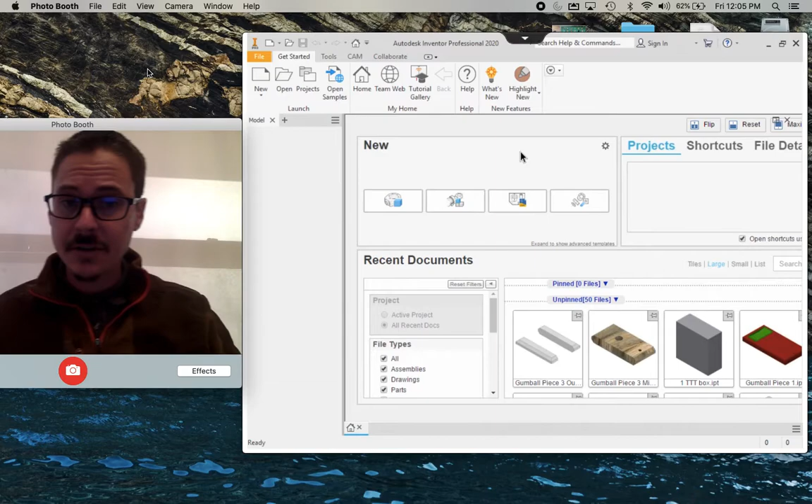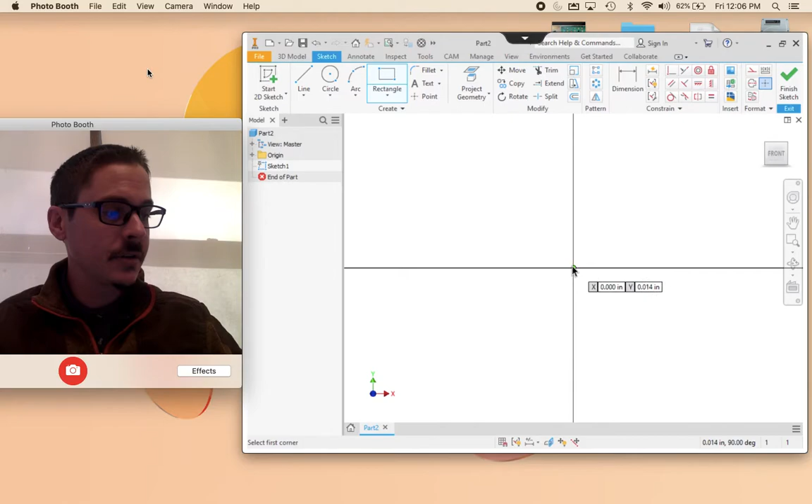I've already opened up Inventor in the workspace. I'm going to create a new standard IPT. And I'm going to start a 2D sketch on the front plane like we've been doing, the XY. Grab a 2-point rectangle. My first point is going to be at the origin. One click. Slide your mouse up into the top right. This is going to be 8 inches long and 3/4 of an inch tall.

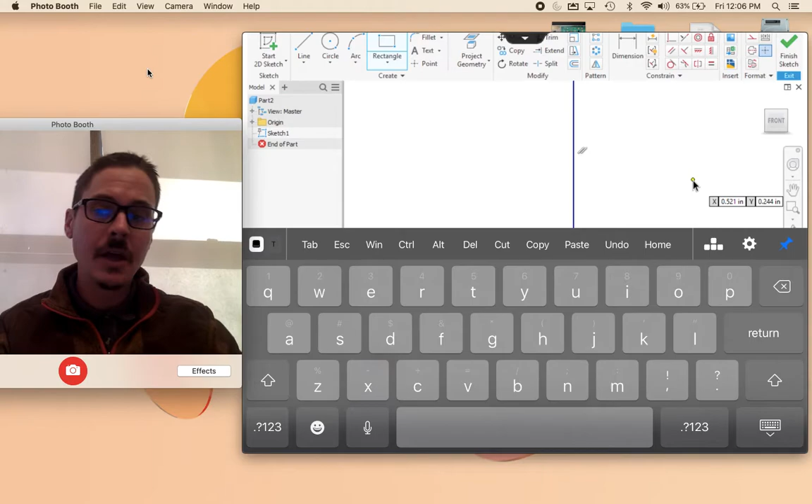So grabbing my keyboard, I need 8, tab, 0.75, return. Now before I put my keyboard away, as I normally like to do, I'm going to pin the tab and escape bar. Then I'm going to drop my keyboard down. I'd like to get rid of my rectangle tool, so I hit the escape key down here, ESC, and then I click on the word front, so I can see everything in front of me.

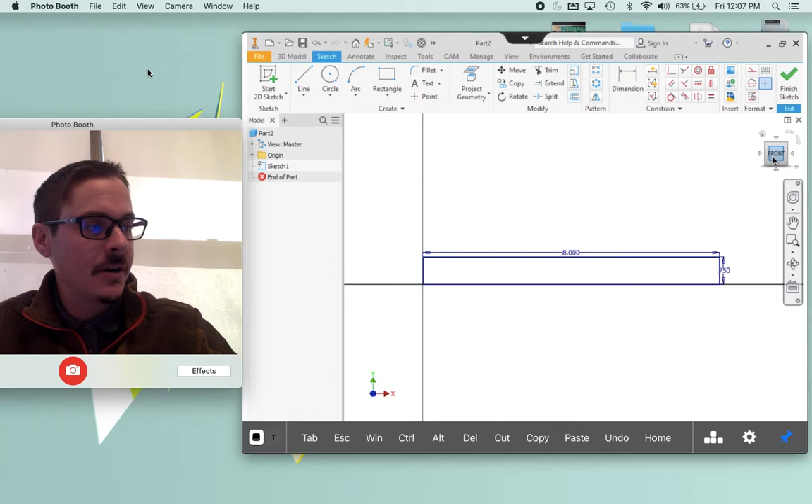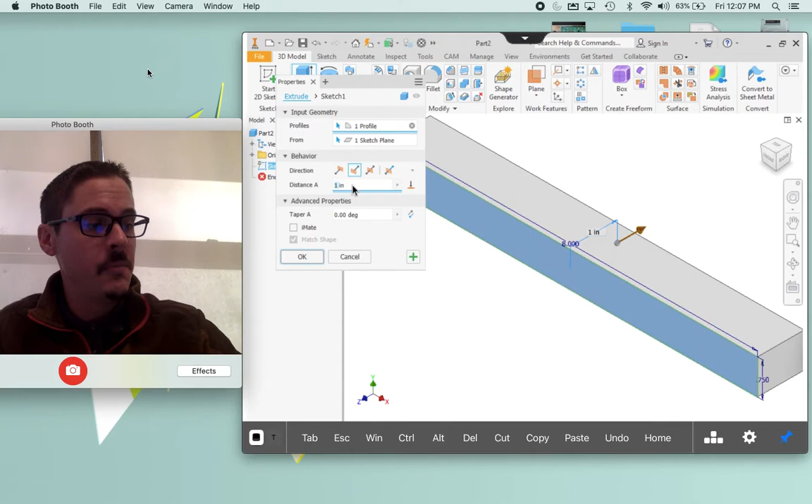Just like we've done with the other parts so far, this is all we need for our first sketch, so we're going to finish the sketch. Come into our home view, and we're going to extrude this 4 inches in direction 2. So I'm going to grab an extrude. I would like to flip this into direction 2 and change the distance here to 4 inches. Put the number 4 in and click OK.

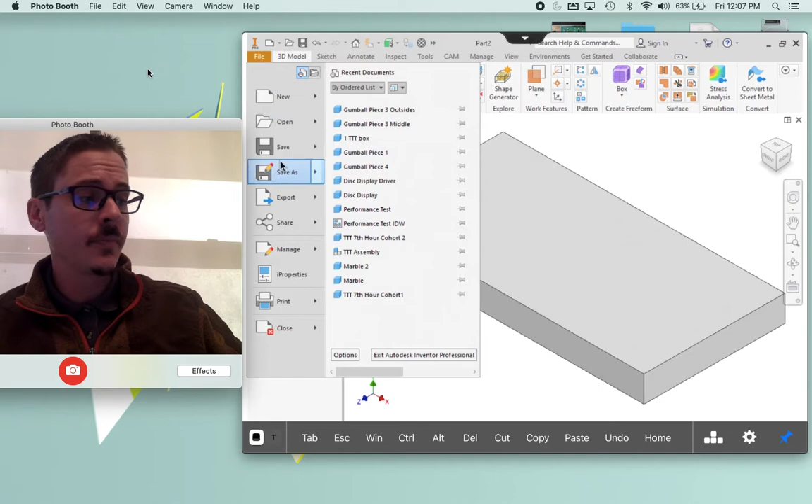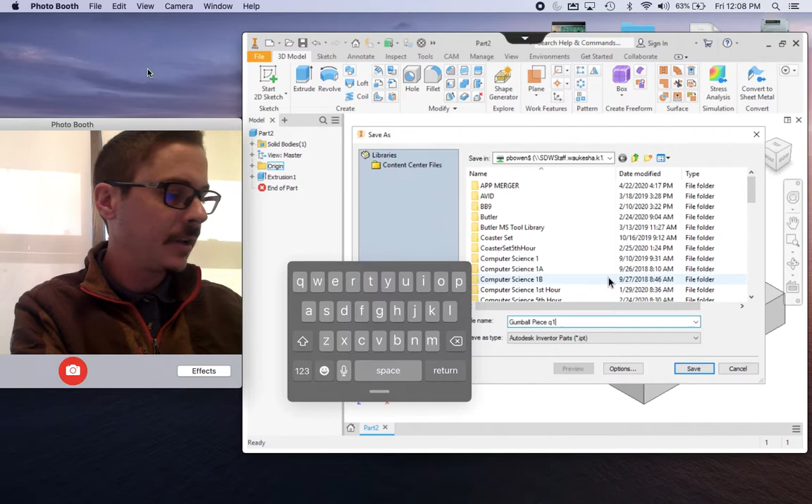Before we go further into the next steps, let's make sure we save this part. We're going to go up to the orange file. We're going to go Save As. Double check you're going into your H drive up here. And then the name down at the bottom should be Gumball Piece 1. I think I maybe put an extra letter in there. I did. Gumball Piece 1. Gonna go ahead and save that. So now that's in my H drive. Anytime I click the quick save, it'll automatically go to that location.

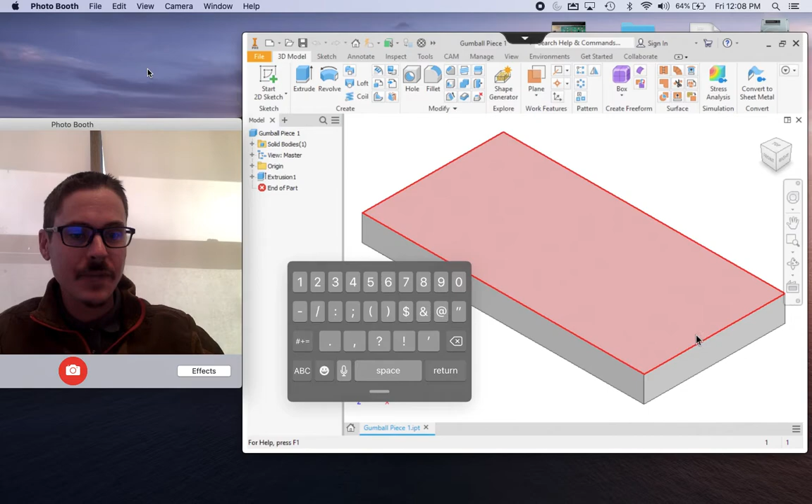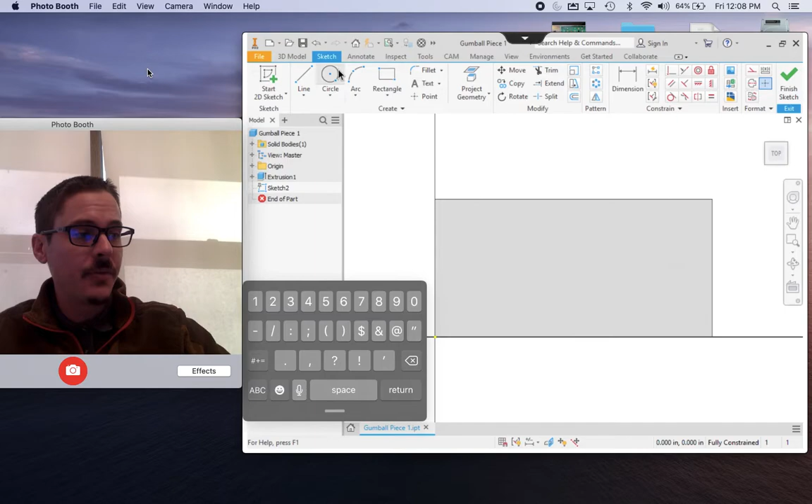So let's draw the easier of the two shapes on here. Let's do the circle in the back because we've known how to do that so far. So we're going to start a 2D sketch on the top of our part. And I'm going to go grab the top view. So like we've done before, we're going to grab a circle tool. We're going to place the center of the circle somewhere on our part off to the right. And then we need to type in a dimension.

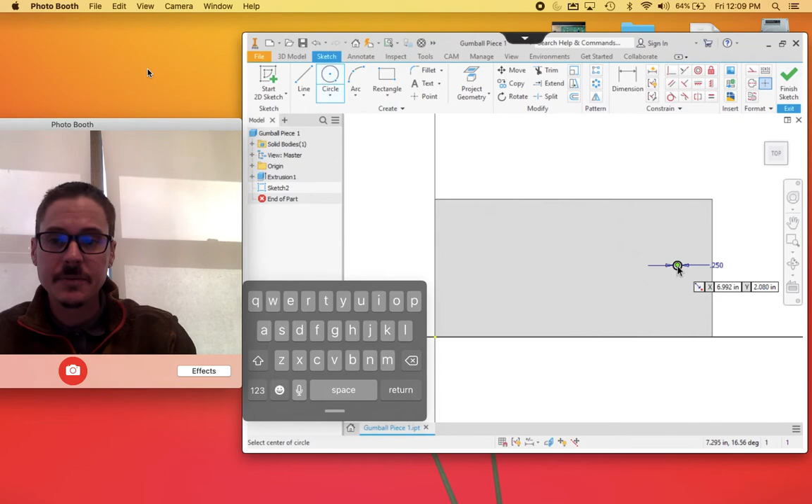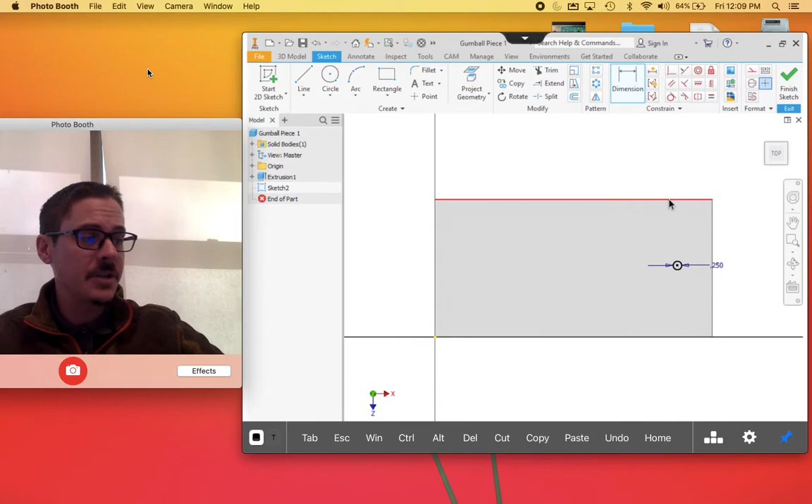So this circle is just like the one in piece number 3's middle. The dowel is 0.25, so that's the size of the hole we're going to make in Inventor. 0.25 and hit return. I'm going to hit my escape key to drop my tool. So now we have a hole that's the right size, but now we need to locate it left to right and up and down. So I'm going to grab a dimension tool, and I'm going to do a dimension from the top of my piece to the center dot of that circle, moving it off my part and between the arrows here. I'm going to do my third click. We're going to make this 2 inches from the edge. With your keyboard, put in 2.

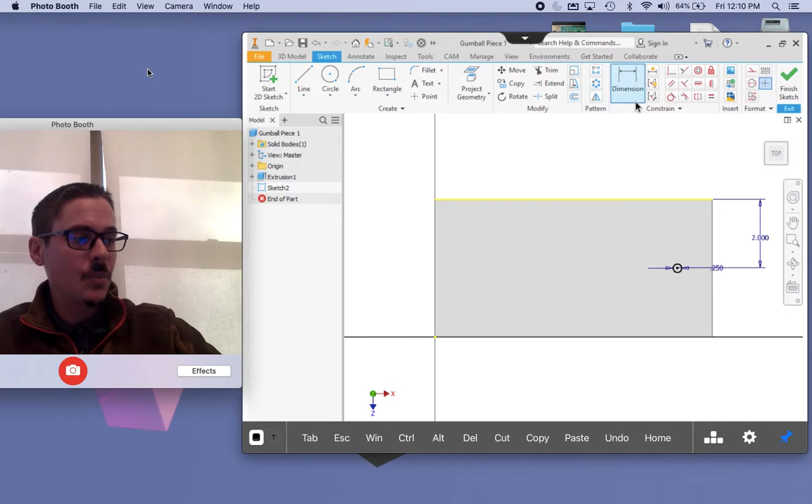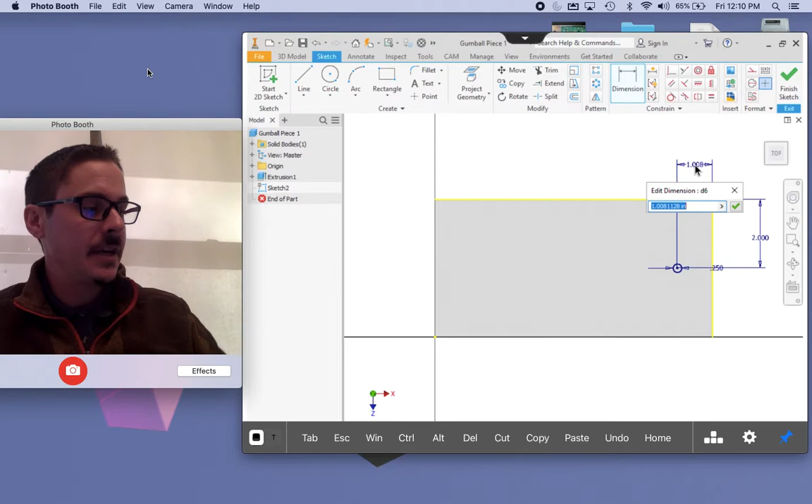Next, while I still have the dimension tool in my hand, I'm going to do a dimension from the right side edge, 1 click, to the center dot, 2 clicks, and then I'm going to move this between the arrows and off my part. And this is going to be 3/8 of an inch from the edge. With my keyboard, I am going to type in 3/8. And then either hit return or your green check mark there.

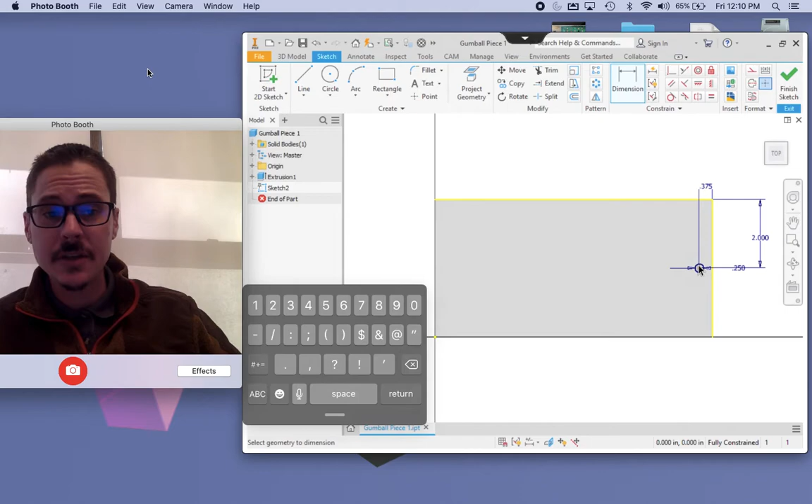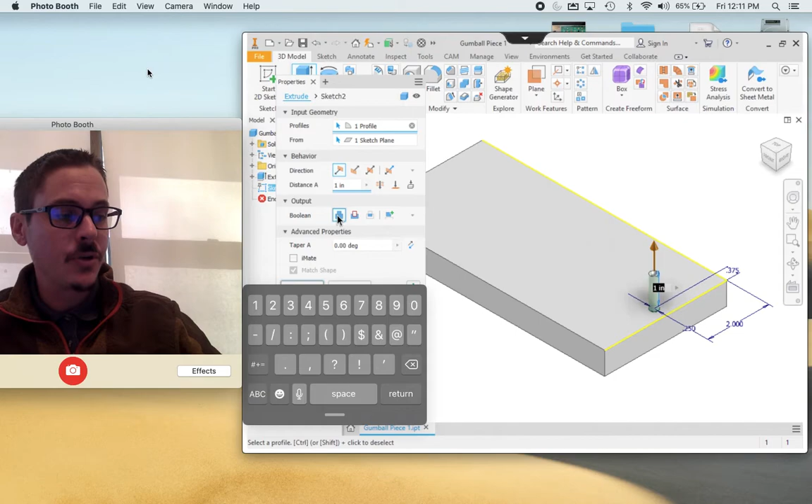Okay, that circle is exactly what we need. We're done drawing this. We have a size and 2 locations. So we're going to go to the big green check mark to finish our sketch. If we need to, click the home view so that you can see everything. We're going to extrude cut this all the way through our part. So we click extrude, we change it from join to cut, and instead of cutting 1 inch deep, we're going to come up to that symbol that says to cut through all.

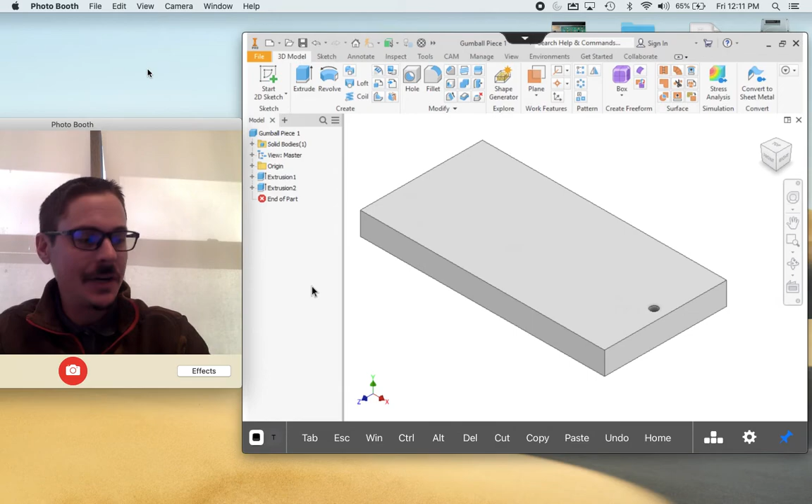Once you've put all that in, we can hit OK. We've cut our circle out, we're good to go. So we're going to come up and make sure that we save our file. Quick little save, goes out with the same name, same location. Now we're good to make this piece right here.

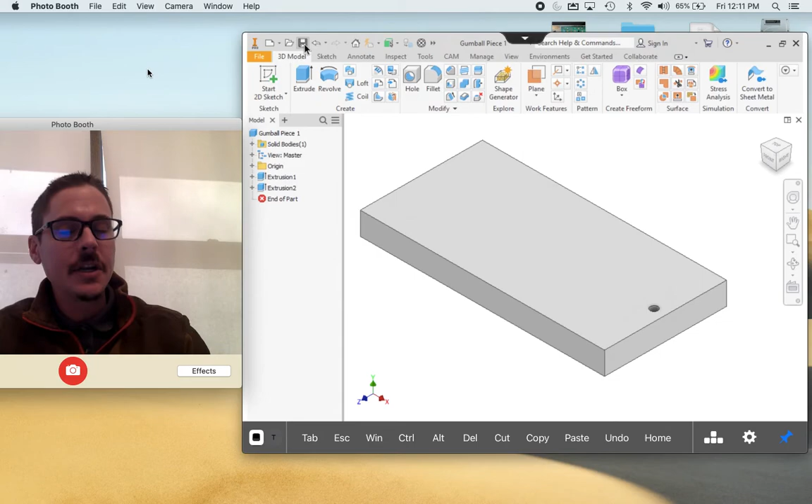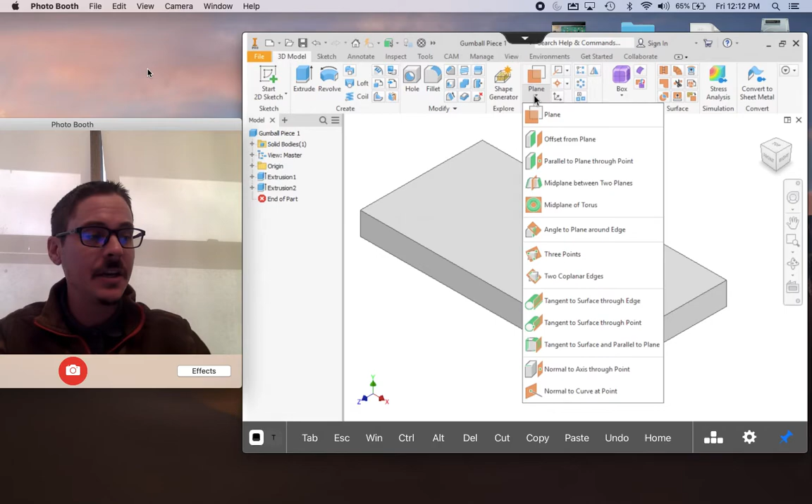All right, this is a funky one we have never done. We're going to use something new called a work plane. So looking at the planes here, you'll see a little arrow below that. There's a ton of different ways to make your own planes. You can draw on planes that exist. You can draw on the XY, the XZ, the YZ, or you can create your own. So we're going to do an offset from plane.

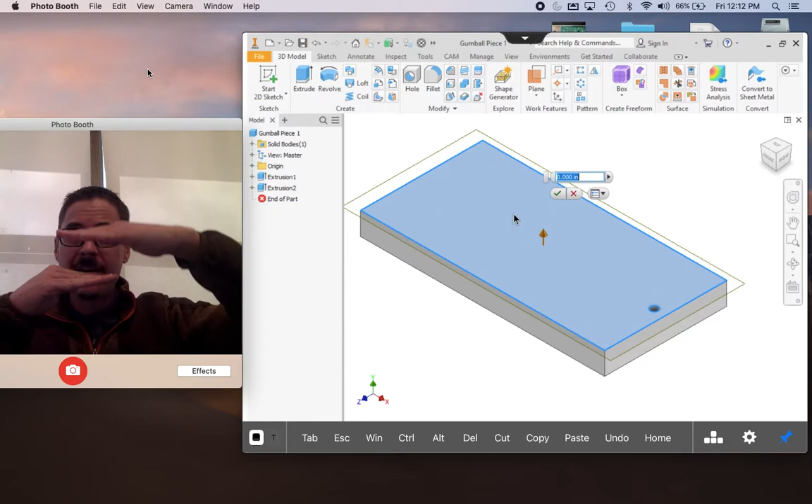The first thing we need to do is click on the top of our part. That's where we're going to say, I want to be offset from this plane, and I want to go up 5 inches above it. So you'll notice there is 0.000 there. We're going to type in with our keyboard the number 5, and it's going to put our sketch 5 inches above our part.

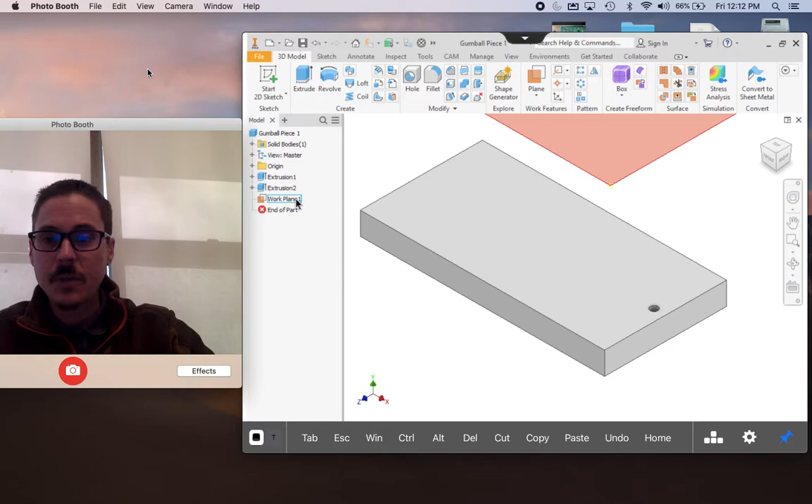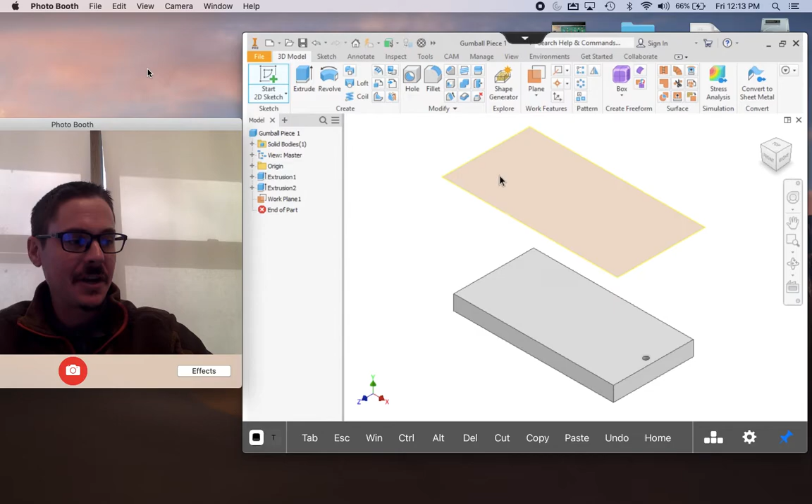Hitting the green check mark, you'll now notice that we have a work plane over here that we can now use. So I'm going to go to the home view. We're going to go do a sketch on that work plane. So I'm going to start a 2D sketch. I'm going to click on top of this. Looks like I have to select the edge in order for it to highlight. Notice there I needed to come to the edge. That's where I want to start my 2D sketch. And I'm going to click the word top to get it nice and centered.

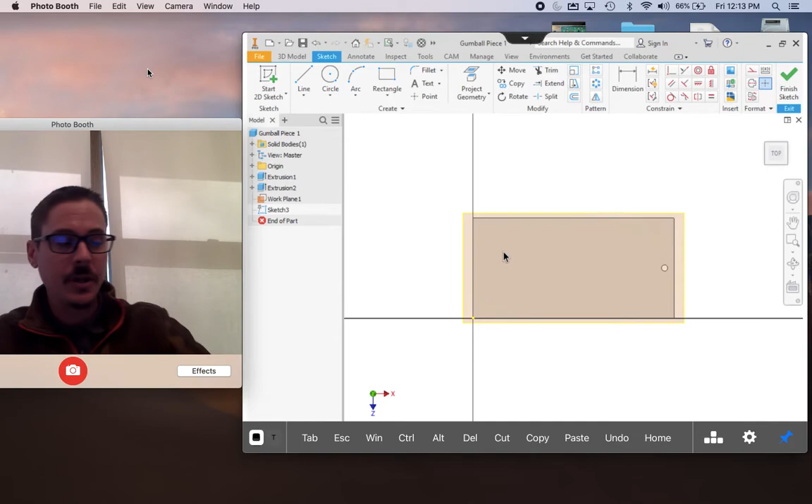We have another tool that we haven't used before. I want to take the shape that's down here and I want to project one of the lines up and onto my work plane. So there's this tool called Project Geometry. I'm going to click on Project Geometry, and I want to come in here and I want to project this line right here.

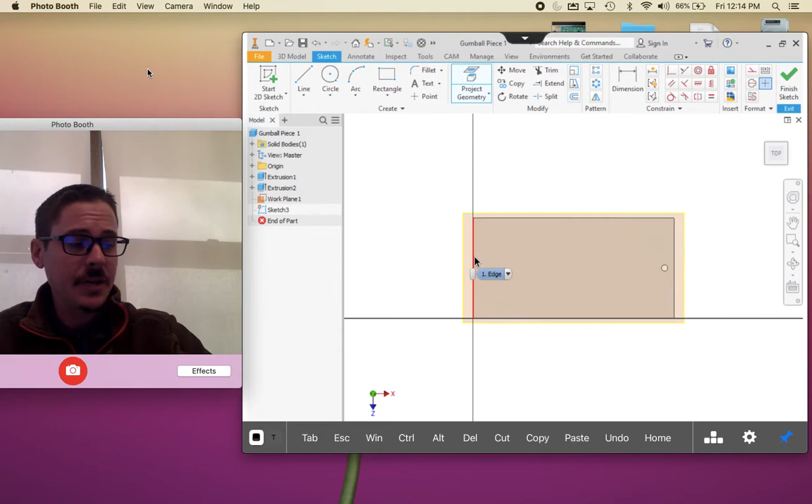When I click on that, I'm going to hit the escape key and show you what it's done. If I hit escape and I come to my home view, you're going to notice that it just took that line and it put it up on my work plane for me. So now we can work with that line. Let me go back to the top view.

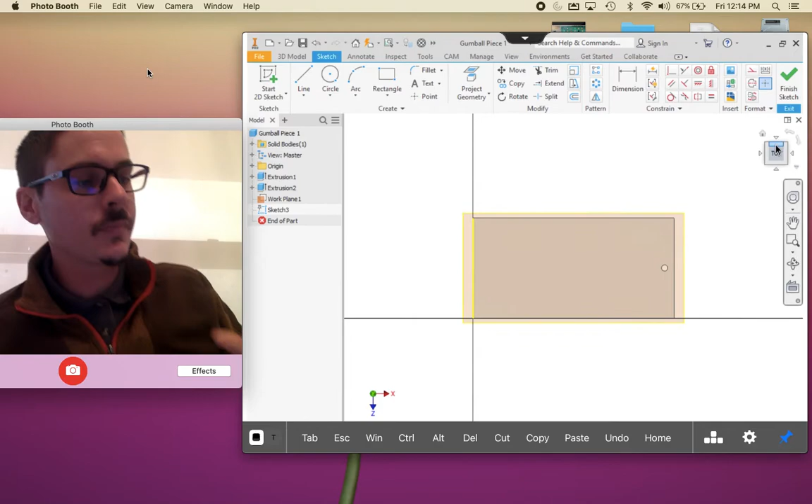Okay, we are going to grab a 2-point rectangle. This rectangle is going to be a little tough, so stay with me here. I'm going to grab the tool, taking my pointer, I'm going to run my tool over that line we just projected. What that does is it activates it, and if you move your mouse over, you'll see in this video here, I have a dashed line coming off of there.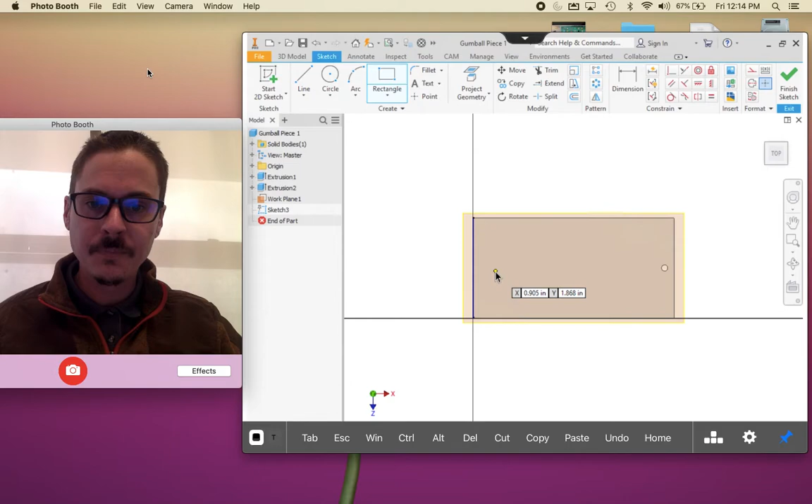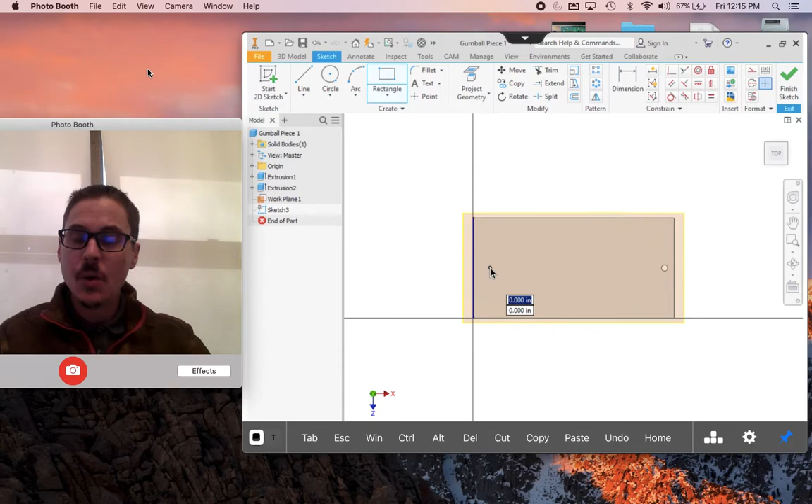So that dashed line is coming off of the midpoint. We want that highlighted blue line. We want to grab that dashed line so we know it's coming off the midpoint. Once that is there, we can click to place our point, kind of where I have mine. We're going to move our mouse or our pointer to the upper right. It's important, we don't want our rectangle going this way. We want our rectangle going this way. So we move our mouse up into the upper right.

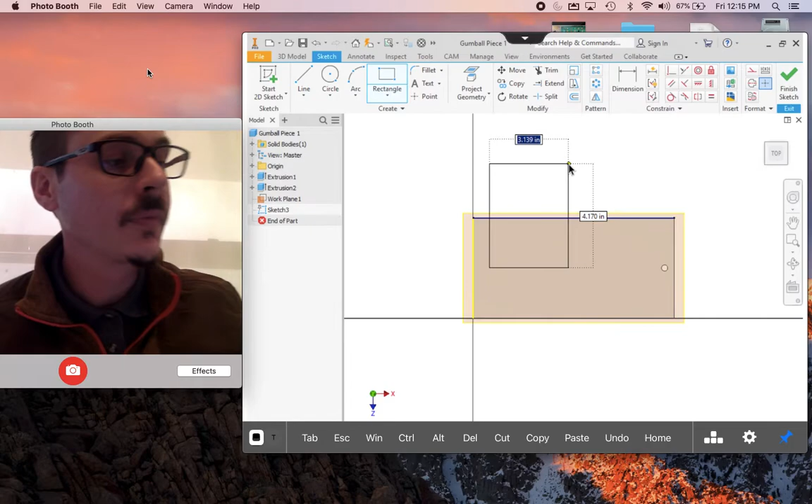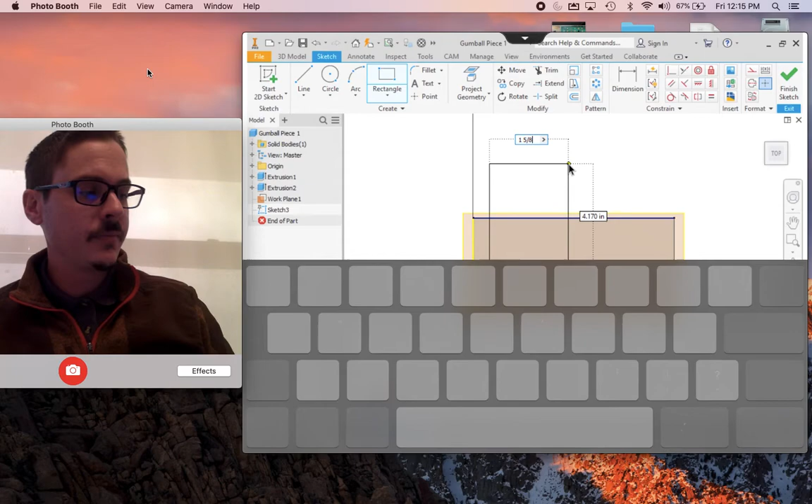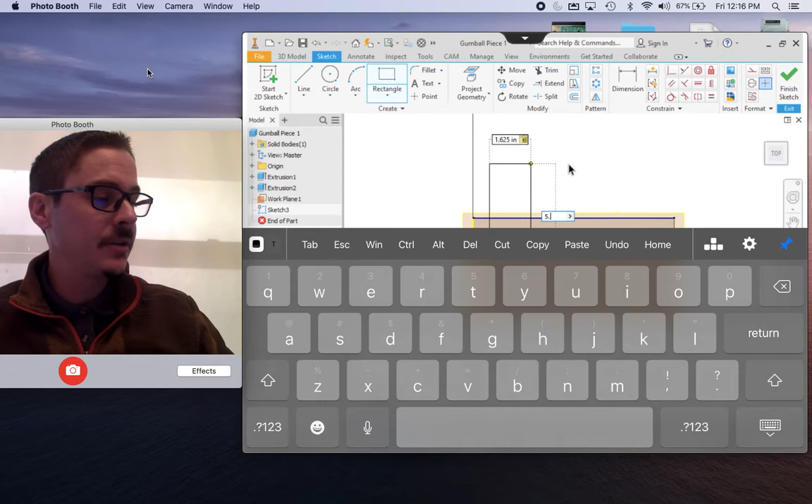And now we need to tell it how wide and how tall to make this rectangle. So this rectangle's width is 1 5/8. With my keyboard, I'm going to type in 1 space 5/8. I want to switch from the width now to the height, so I'm going to use this tab key. And the height of this rectangle we're drawing is 5.25, 5 1/4, 5.25. Once you have both of those dimensions in, you can hit return and drop your keyboard.

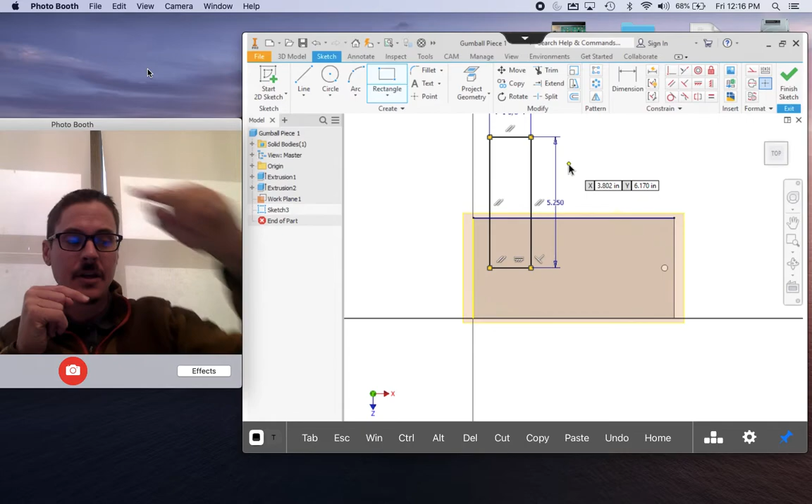So we're pretty close. We have the rectangle. We know it's the right width. We know it's the right length. We know that that rectangle lines up with the midpoint here. We're missing one final thing. We need to grab our dimension tool.

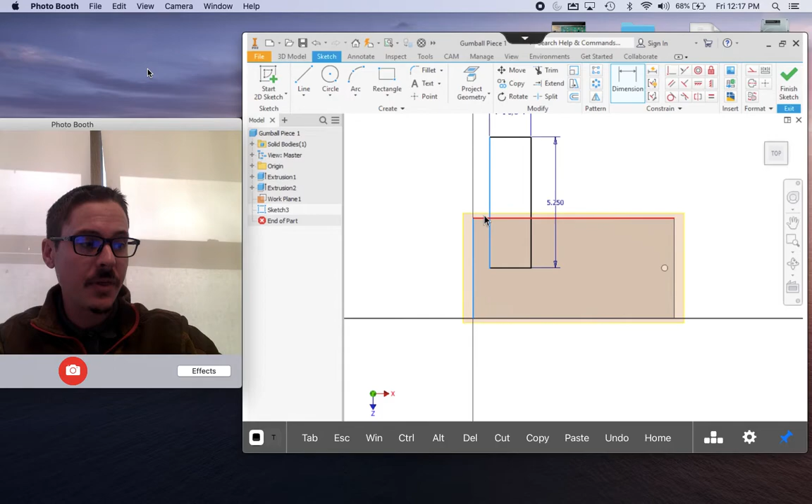We need to do a dimension from that projected yellow line, 1 click, to the left side of our rectangle, 2 clicks. We're going to put the number up above and between those two lines right here. And this needs to be a 1/2 inch. So I'm going to type in 0.5.

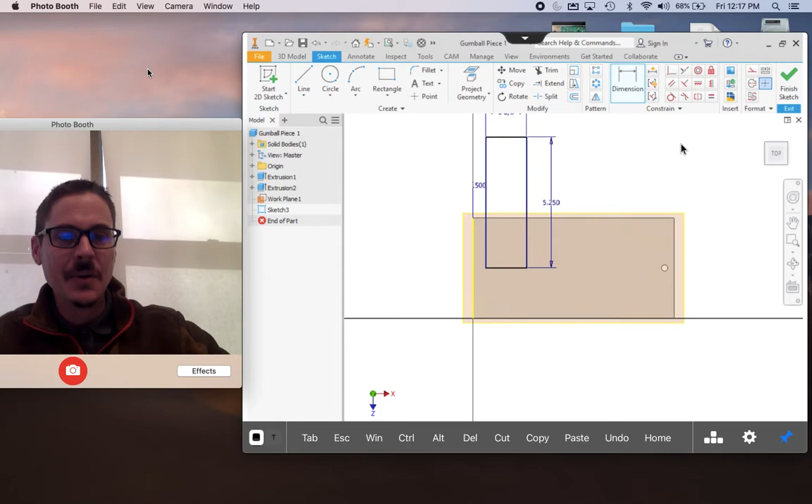Return. Okay. We have everything we need on our sketch. It is perfect. We're going to come up here and we're going to finish our sketch. And I'm going to go to the home view so we can see everything.

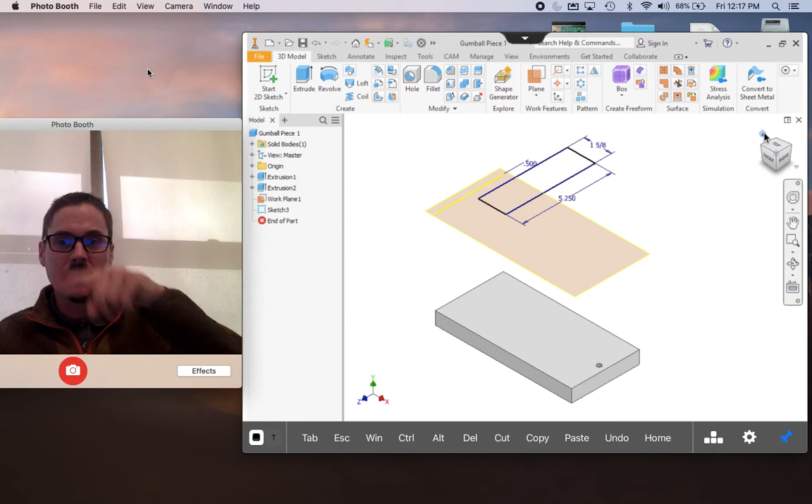Now comes the fun part. We made our work plane 5 inches up. We actually made that rectangle 5 1/4 inches long. What we're going to attempt to do is spin it, and instead of extruding straight, we're going to revolve it. So right up here is my revolve tool right next to extrude.

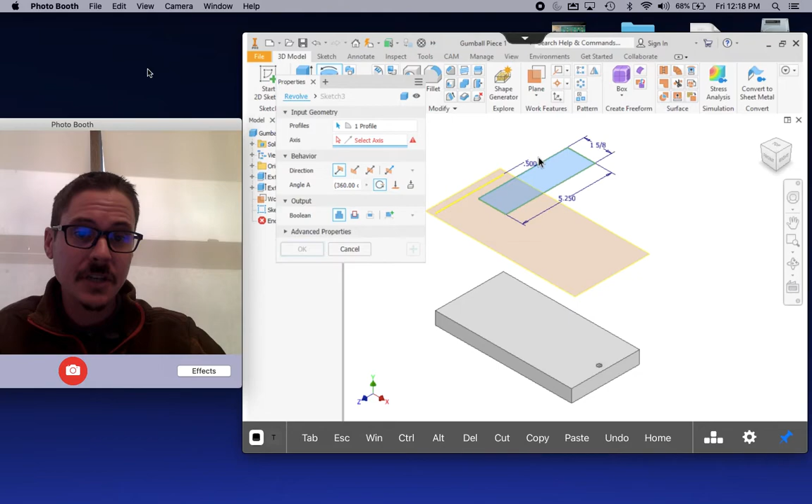Lucky for us, it already selected the profile. You see it grabbed one profile. That's awesome. You'll see it's highlighted blue. If you don't have that profile, the first thing you would do is click inside of that rectangle. Now we need to select an axis. What do we want to spin this around? So I'm going to click in here for the axis.

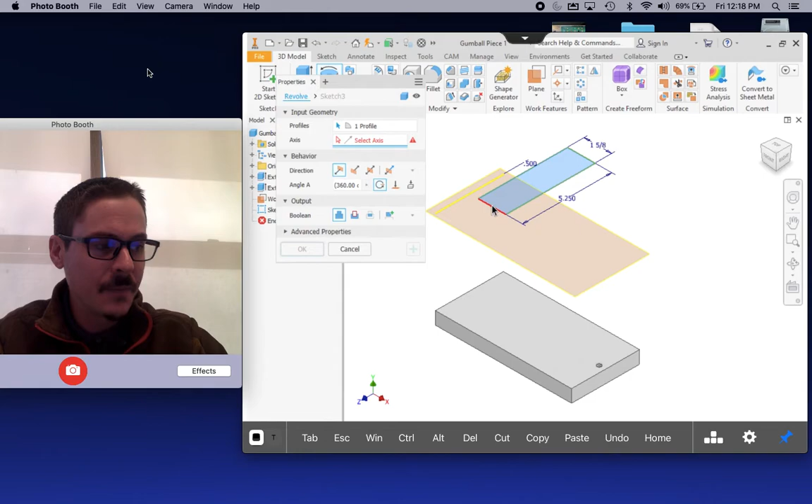And then I'm going to take my pointer. Now I'm going to come over. Oops. Maybe you have to click that twice. You need to come over and you see this line right down the middle here. That is what we want to spin around. So we're going to select that line as our axis. Pretty good.

But instead of joining this, we're going to tell it to cut this. And it's going to take that rectangle and it's going to spin cut that out of our piece there. Really awesome. All right, let's go OK.

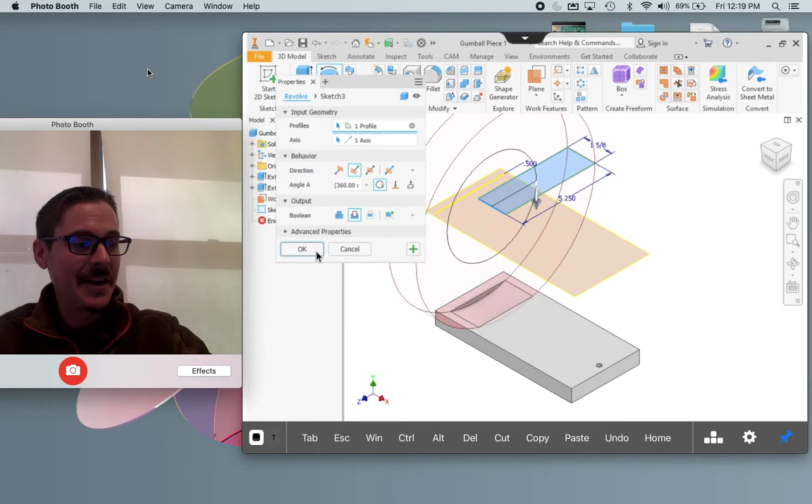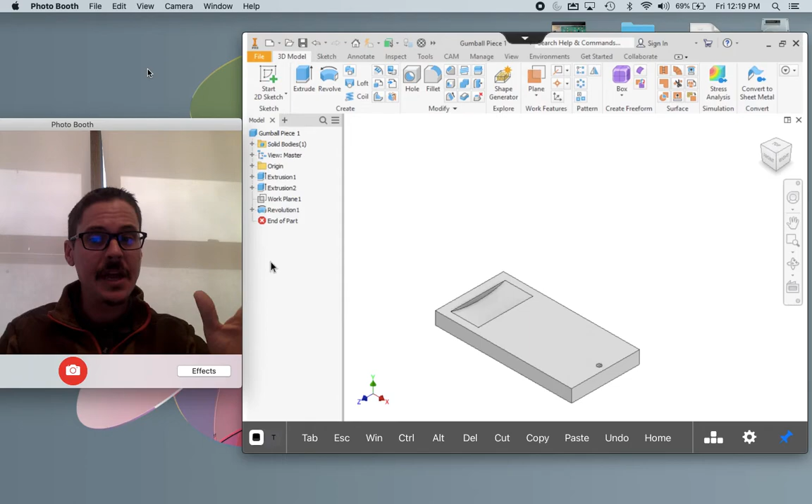Before we move on to chamfers, I don't want to see this work plane anymore. I don't want to delete it, but I just want to make it kind of go away for now. So over on the left-hand side, you'll see the work plane is still here. Using the pointer, if you tap and hold, you're going to get the right-click menu. Down here, there is visibility. I'm going to tap on that visibility, and you're going to notice that it goes gray now. I didn't delete it. I just said, hey, I don't want to see this anymore.

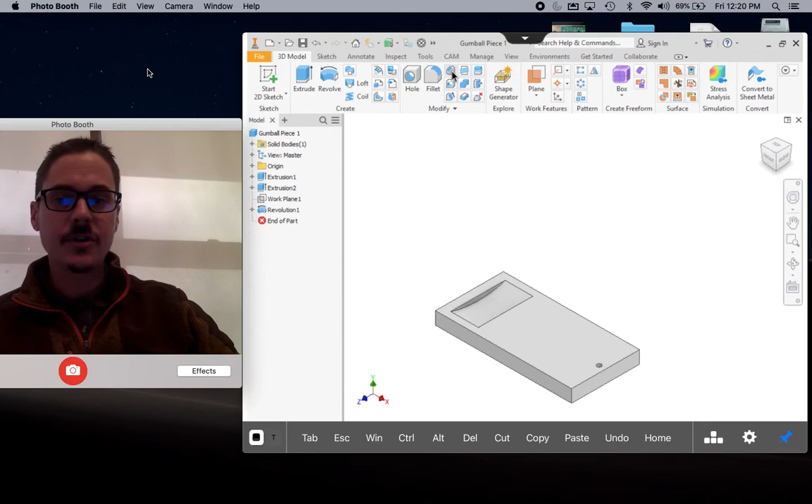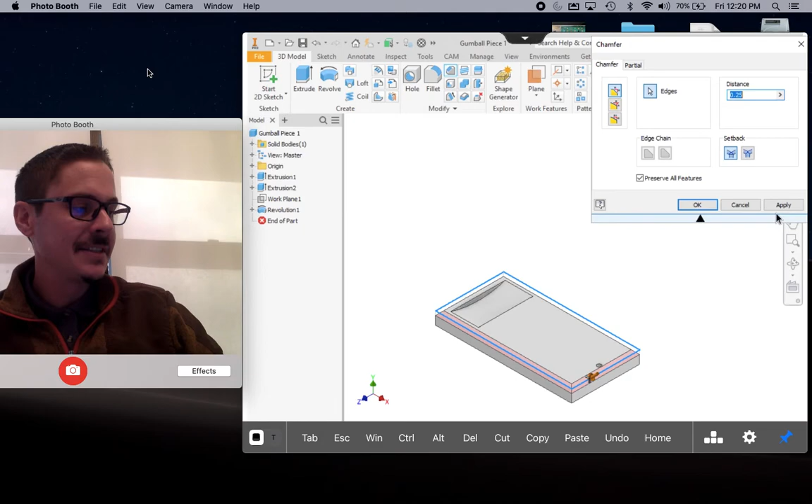Next up, we need to add our 4 chamfers. We are only going to be chamfering the top edge of this piece. We are not doing chamfers on the bottom. So I'm going to come into my chamfer tool. I'm going to change the distance to 0.25. And then I'm going to select 1, 2, 3, my 4 top edges. Tell the chamfer to apply those 4 edges, and then cancel.

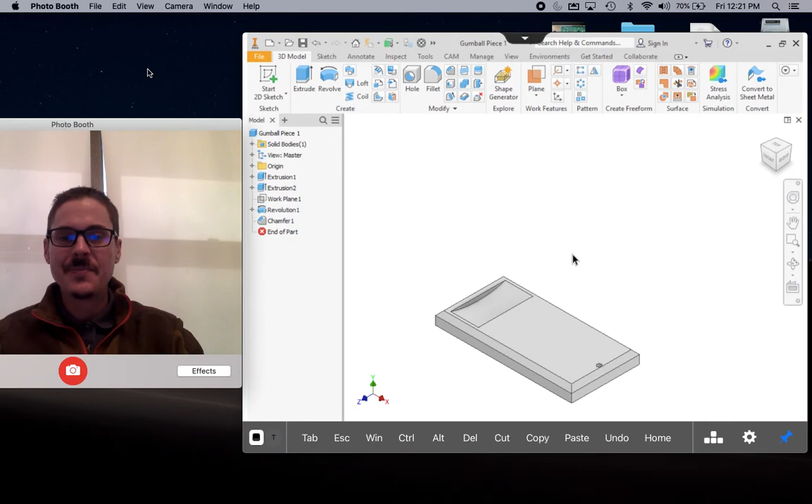So you're going to see our hole comes right next to the chamfer. Our little part that we cut out comes close to the chamfers here. Let's go ahead and save this right away.

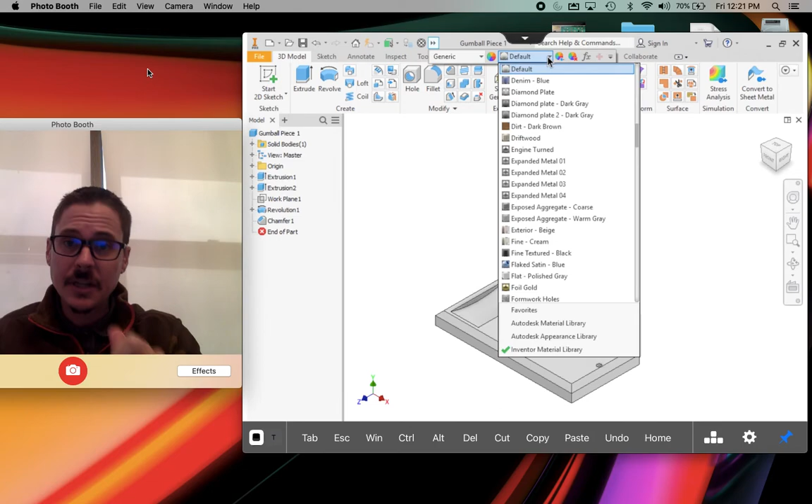Okay, we're going to do a couple final things. We are going to make this piece wood. So I'm going to come up like we've done with the past pieces. I'm going to drop down that default list. And I'm going to go all the way down. I'm going to go back to the white oak. I just want my bottom piece to be white oak.

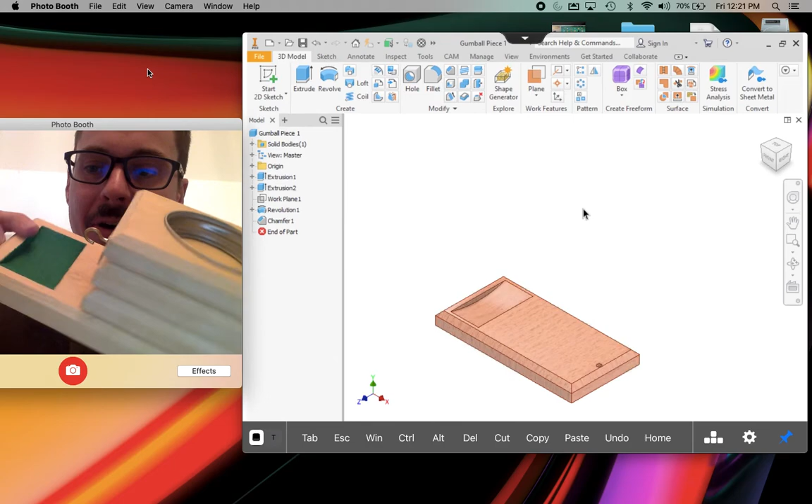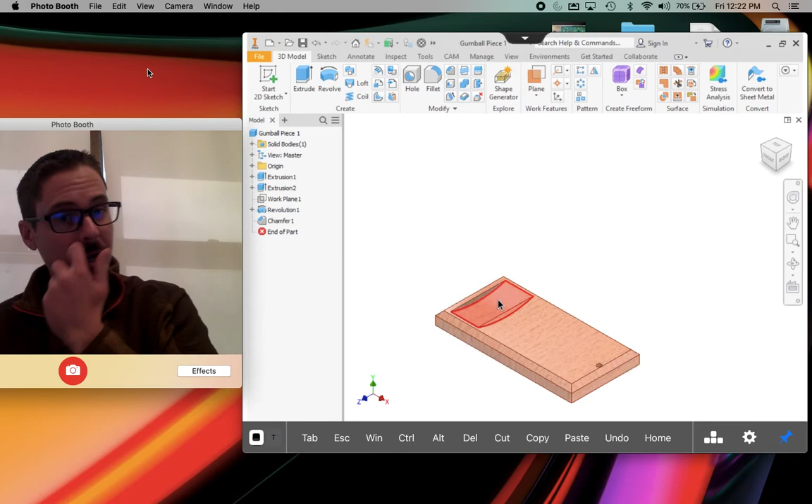But there's one final thing here, and we'll see if we can get this to work. All right, this part, you'll notice, has felt inside of here. I'm going to teach you all the process of how to add felt into here. So on our design over here, let's attempt to add that. What I'm going to do is take my mouse. I have no tools in my hand. I'm going to come onto this face, and I'm going to tap and hold on that face.

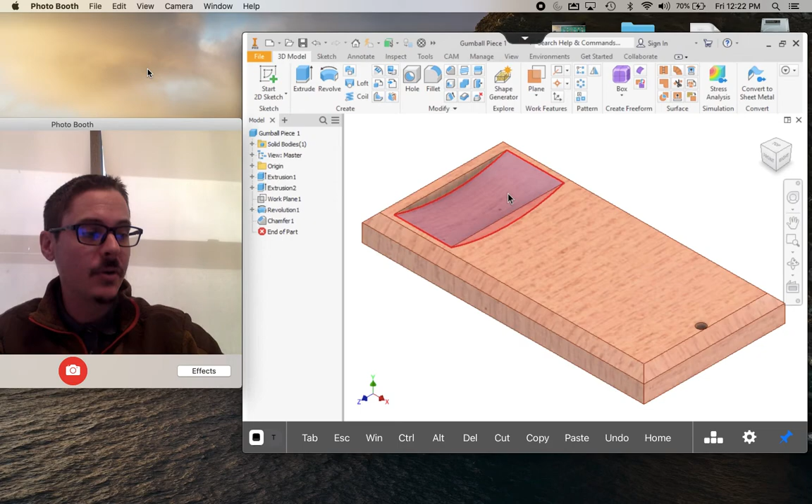Looks like I need to center my view a little better. Let's try this again. Tap and hold, and here are my properties. So it wants to know, what color do you want to make this? And I'm going to select dark green.

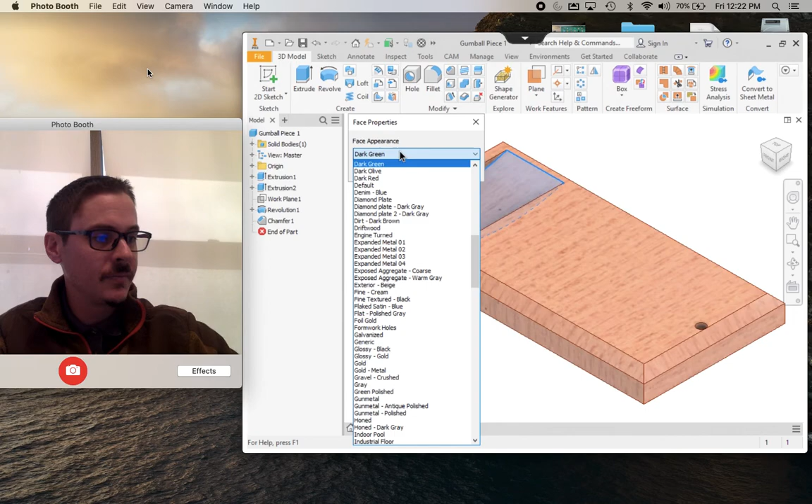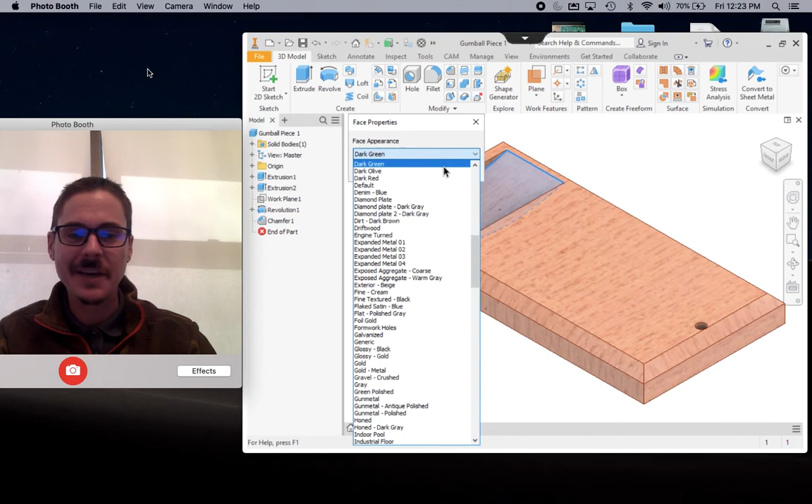Let's see if it'll lock. And it won't. That's okay. I figured we might have an issue with this. We're going to click off of that. That's something we can do when we have Inventor in the classroom. We'll just leave it like this for now, and when I have you guys back in the class, I'll show you guys how to change that to dark green.

Let's go up to the top. Let's save our part. We are done with all of the cutting for piece number 1. Good job. Next up is going to be piece number 2 in here.